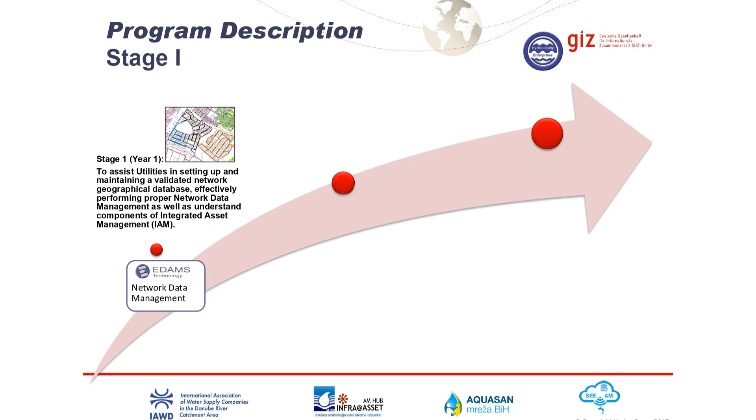So we have stage one, a number of utilities that completed stage one. And what exactly did they complete? An initial assessment we did, setting up on the cloud, data collection, dissemination, and monitoring and control.

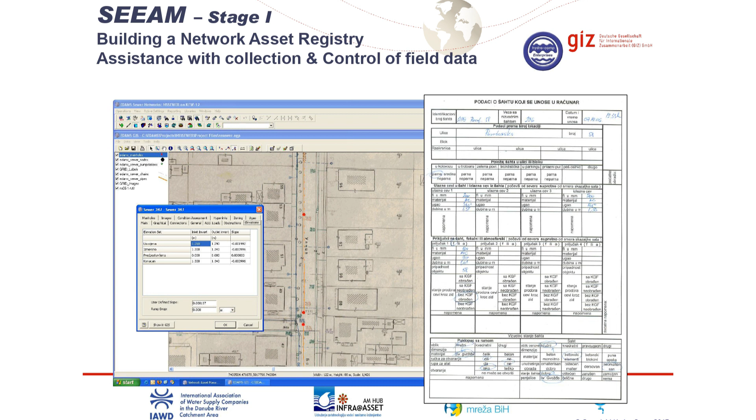So what we've done, we took GIS data and converted them to EDAMS. We assist them through the hubs to the collection of field data or conversion of any kind of graphical data.

This is a nice example from Kragujevac. It's a rather big and complicated network. Kotor is also a favorite.

And we're continuously assisting with resolving discrepancies, problems in the network, new data capturing, and so on, and providing monitoring and reporting on a weekly basis.

Now, so these are the topics that basically were covered on stage one: the cloud, the collection, discrepancies, and reporting.

These are topics that have just been mentioned, but not really covered in stage one, that being the zoning and the reporting manager. At some stage, we will have to revisit them, and we'll have to say more about how to use the reporting manager, how to export data, how to utilize the zoning.

Zoning manager, reporting - very useful tools, to discuss further.

There are a few other topics we only mentioned but didn't cover, and I call them pilot topics. This is facility management and sewer networks. I heard some gentlemen mentioning sewer networks a bit earlier. Now, let me clear it up.

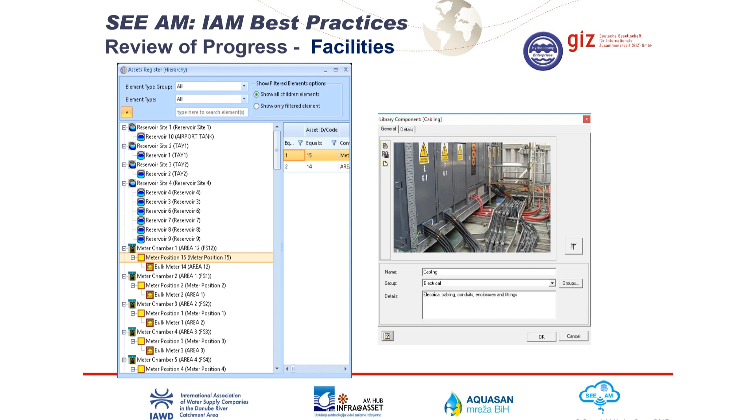Together with that, if we address the sewer, we have to address facilities. Facilities mean primarily treatment works, whoever has treatment works, and whoever has any kind of other facilities to manage. So we see that as a package that hopefully will form a follow-up extension just addressing sewer and facilities.

So one thing I want to tell you today is that apart from the project going on for the next two years, we're actively looking for ways to extend it. We don't see it, as we explained to you in the past, as a project - we see it as something long-term.

And long-term means that from our side, the service of the system will continue as you have it now, but that must go hand in hand with additional CD measures, trainings, and so on.

So we will see what formula will convince our GIZ partners to extend the project. The sewer and the treatment plants is a logical follow-up - it was mentioned by many of you. So yes, this is one potential avenue we're exploring, and definitely we're going to include it.

Facility management for us is very important, it's very big, and touches on another subject we haven't discussed at all, but we're going to discuss next year: municipal assets, because your assets belong to the municipality.

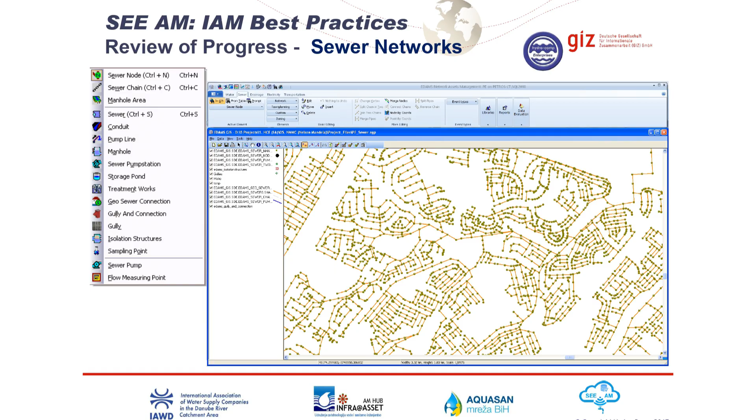So that might be a good opportunity to open another big discussion - how we bring in the municipalities and how they become actually part of the project, and the sewer networks. Okay, that is a synopsis of stage one - that's what we did in stage one.

That's what we would like to do, and that's what we have done. Then we come to stage two, which is the maintenance.

This was quite an ambitious stage meant to cover all these things. I would like to say that maintenance is extremely important. A number of utilities ask me, we don't like maintenance, we do what we do, just leave us alone. Can we skip to platinum stage and skip maintenance? The answer, in theory, is yes. You could go from stage one to stage three, because to set up a DMA, you don't need to have done maintenance.

But it's not the correct approach. You can't ignore maintenance. If we do an asset management program ignoring maintenance, we're fooling ourselves, because the heart of asset management is maintenance. To say that we're going to skip maintenance is not giving the right message, and it also stops what we want to do this year, which has to do with rehabilitation.

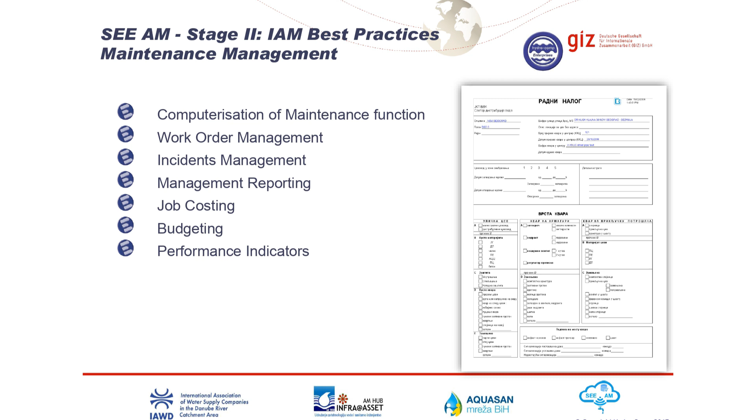We had quite a tall order for maintenance, and some of you might be frustrated because you didn't implement it as fast as you would like. It's a difficult topic for one additional reason: maintenance involves changing procedures on the ground, changing the way people do their work.

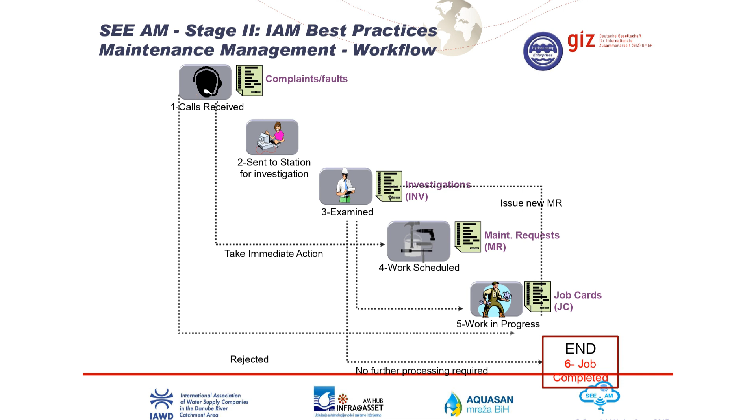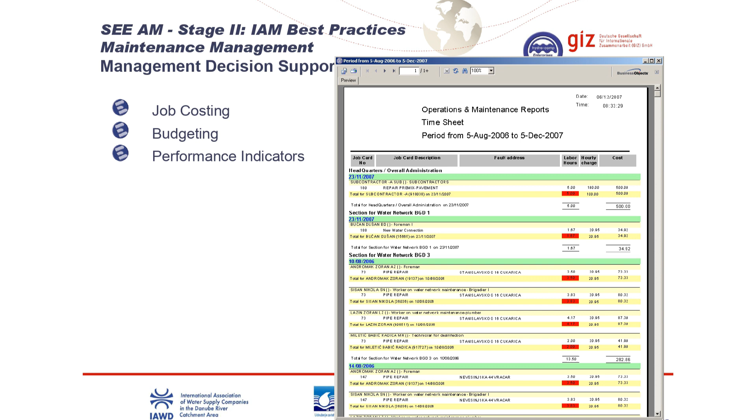I said it from the beginning: for maintenance, you need a champion, somebody to take control. I was recently in a municipality in Greece where for the fourth year, me and the director tried to convince everybody there to start using maintenance. It was déjà vu—we did exactly the same presentation, the same thing, for the fourth year in a row. So yes, it needs a certain attitude, a certain management style.

It has to do with a lot of things within the utility which is not in our control. On top of it, these systems are implemented on premises or on the cloud. When implemented on premises, we come and see what you're doing, see the routines, and help you replan them. On the cloud, we have no control whatsoever—we give you access to the system, and apart from some support, we hope for the best. We don't actively get involved in the reorganization of your utility. We give you advice, we tell you what you should do, but we don't get involved.

If you really want to enforce maintenance—the word is enforce—at least at the beginning, because there is resistance. Any kind of computerization that affects workflows creates resistance. Many utilities might be frustrated because they have a slow path to activate maintenance, but that doesn't matter. You have to be persistent and make sure these things are enforced.

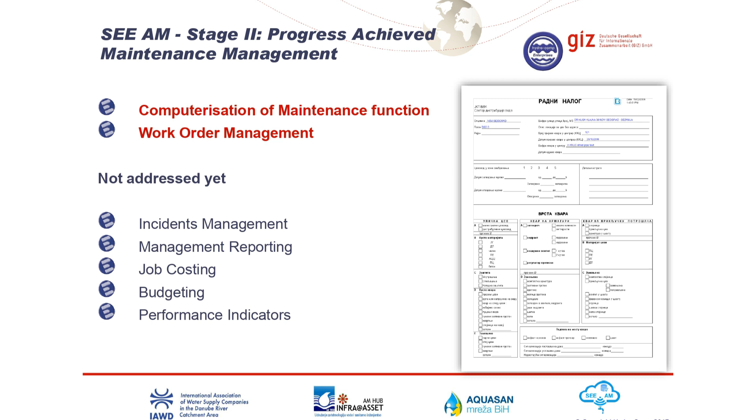We want to revisit these items. We haven't addressed them really because only now are some of the utilities starting to properly capture complaints and incidents and close the job cards. So this was the maintenance management, stage 2, and we come to stage 3.

In stage 3 we introduced two aspects: non-revenue and operation. I say introduced because for various reasons we didn't make much progress. Some of the utilities are quite good, they're persistent, they have zones, and they're getting there. We expect some utilities will manage to balance most of the zones this year, but it's an ongoing effort.

This is the introduction, but there are two sides to it. First is operations. We made an introduction that you have to capture all your logs, and we want you to computerize the logs. That's something we need to rediscuss. For utilities that have a lot of logs captured on paper or Excel, we want all of this to come into the system.

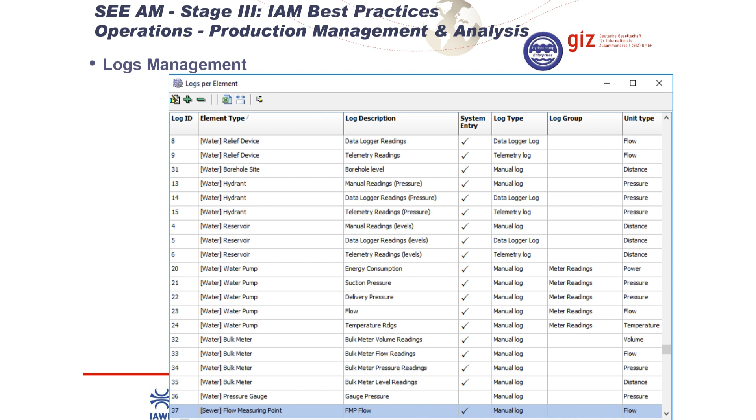We didn't get any queries from any of the utilities on the issue. We would expect somebody to ask how to import this or that, but we got no feedback from anywhere, so I assume nobody is doing anything about it. Since everybody speaks about expectations, we also have some expectations. We'd like you to use the systems and make an effort to use the functionalities that will actually be very useful to you.

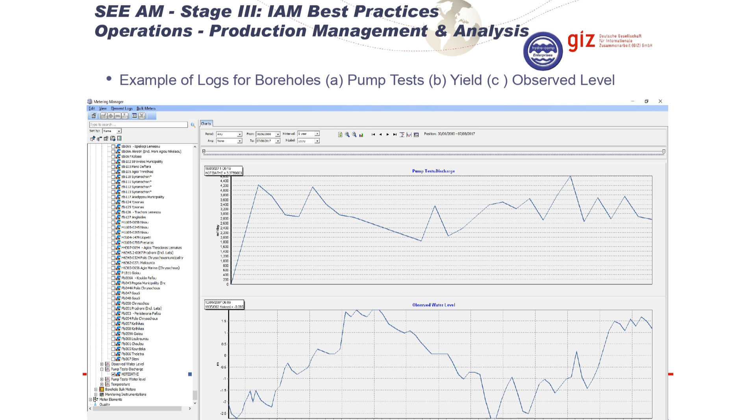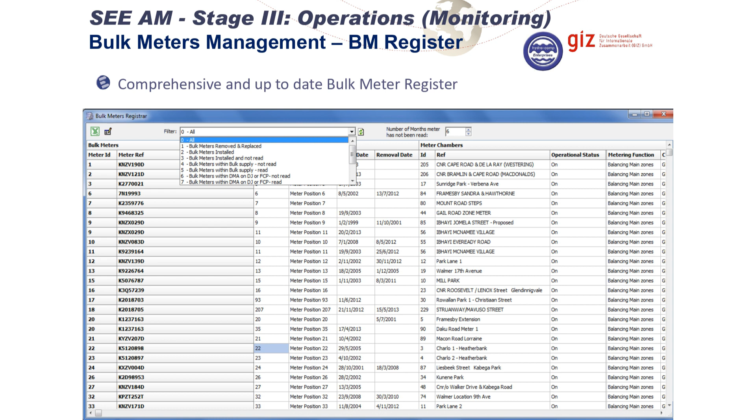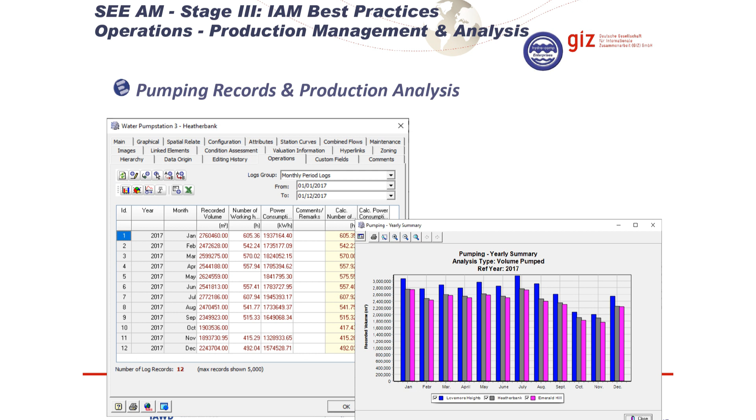This is some of what you'll be able to see and do. Also, for bigger utilities, management of bulk meters is an issue—there are utilities with 30, 40, 50, or 60 bulk meters. How you manage and read them is an issue, along with supply analysis per DMA and records for production analysis. As I said, this part hasn't been addressed by any of the utilities. We didn't see anybody capturing any kind of logs, so this year we have to discuss it again as part of one of the trainings.

The next and most important item is non-revenue monitoring, which involves zoning, bulk meter management, and apparent losses. The objective was simple: pick a few zones and see if we can balance them. We have the networks, all the meters, telemetry or meter readings, and the billing—let's balance it. In theory it's simple; in practice it proved not so simple.

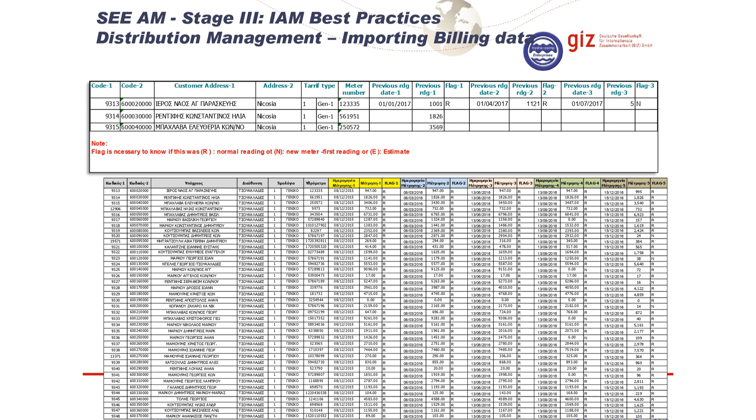Why? We started having problems first with the billing—a recurrent problem. For some utilities in the region, they use similar types of billing with coding and reference to meters in alphanumeric characters. That needs to be sorted out, not because of us, but because of best practices—that's the way you need to refer to meters. It's an important exercise that needs to be completed. We discussed it also with Kotor; I don't know which other utility still has a problem.

As an IT exercise, it's very simple—a database expert could do it in a few hours. It's not complicated; I don't know why some utilities are still stuck on it. If they are, we need to discuss it. In any case, we need to be able to see the billing.

Because if we can see the billing and have GPS connections, then we're in a position to know exactly which connection is related to which pipe, so the zones work automatically. I was discussing earlier with a director, he was telling me he wants to see the zone on the Petroskatsi. Why? There's no reason - the zones change. You open a valve, your Petroskatsi belongs to another zone. This is done dynamically, that's why people have GIS. It's picked up automatically - every time you balance, the system knows which zone this Petroskatsi belongs to, the same moment. That's why we want all the points to be GPSed, we want to know where all the connections are, and if we have that, we know which is the zone. That's why we did the whole zone manager.

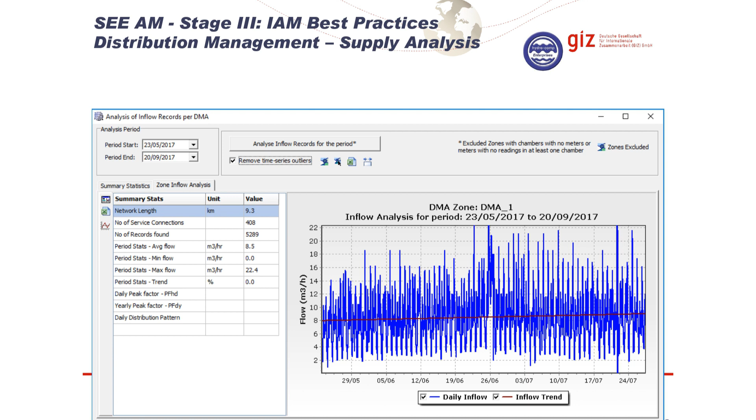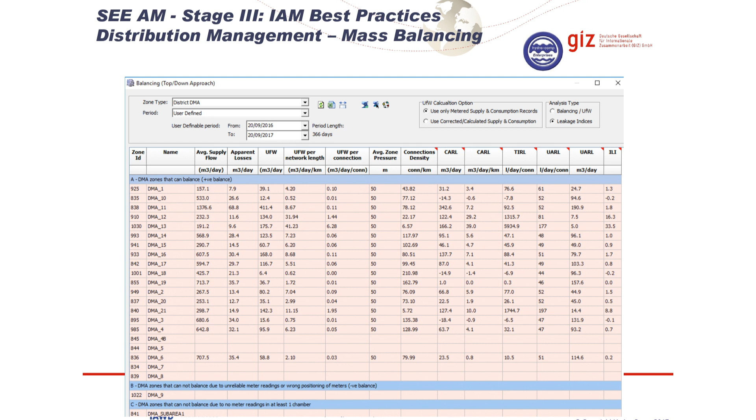So again, bringing in meterings from telemetry - we didn't see any of the utilities ask for that, to link to the telemetry. What is the objective? Simple: to get proper reporting, proper top-down and bottom-up IWA standard with all the indicators reporting on your status of non-revenue water per zone. That is the output, and its automation is the first very tangible result of this 3 years effort, to know exactly in which zones they have problems with non-revenue water.

And these are some of the reports we discussed on training, and that basically concluded what we've done the last 3 years. Now, not what we've done - what we tried to do, because we haven't done it yet. So we introduced it, we explained when it's to be done. We understand that this exercise will take time and persistence.

So I know all of you are asking, what are we going to do now? What are we going to do next year? Yes, fine, we're going to do things next year. My question to you is, what have you done till now? I can reverse the question very well: have you balanced zones? Have you captured your operational records? Are you ahead with your maintenance? Have you done all these things so we're going ahead now? Before you're very quick on asking about expectations, please think that all these things we introduced, for most of you, have not been completed. So there's still a lot of work to be done. It doesn't mean all the time we have to move forward, introduce new things, and leave all these gaps behind us.

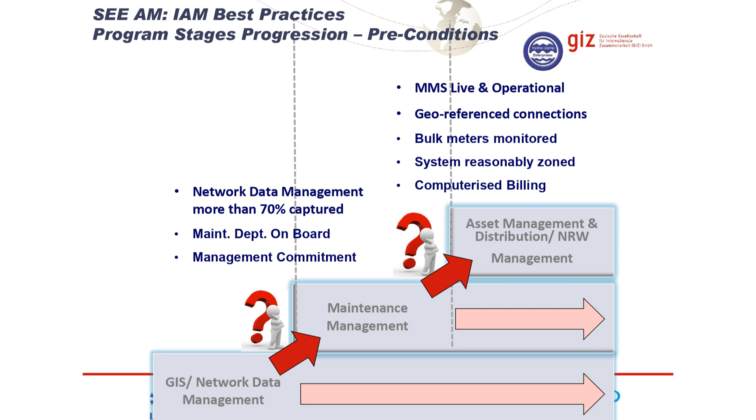This is a ladder that's going up, hopefully going up. We're saying some of the utilities might have questions - we presented that also last year. How do you move from stage 1 to stage 2? It's an obvious answer: if you capture the majority of your networks, if you think you have reasonably good data. When do you move from maintenance to asset management? There are requirements: if you have bulk meters, if you have zoning, and if you have georeferenced connections, so if you think you're ready to actually balance your zones. And again, I'm saying it again, we see this as a program, a recurrent program, an ongoing program. We don't see it as a project, not from our side anyway.

So one of the changes we introduced this year, because it's also a recurrent issue, in your contracts that we're going to send you very shortly next week - we don't want to go every year through this exercise, sign the contract and sign the contract and sign the contract. We're going to say that any utility's contract with us is recurrent, and any utility will receive a letter 60 days before saying the contract is being renewed. If you want to cancel it, you have 60 days to cancel it. So we don't have to go through this tedious procedure every year to get approvals, you to get approvals, and so on. It's a never-ending story, and that creates serious delays for us, because we end up starting the project with all the utilities sometime in March, April, which is a bit too late.